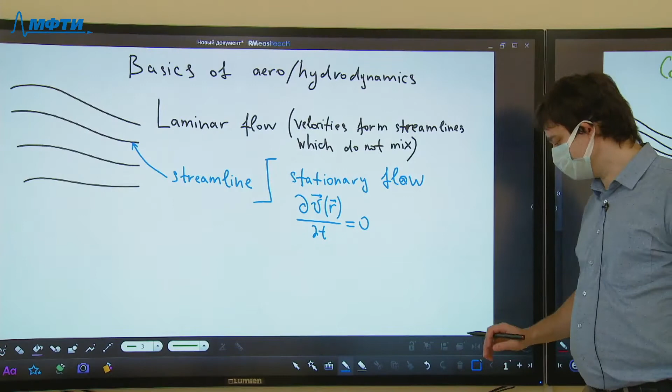Today the topic of the lecture would be basics of aero and hydrodynamics. So we are going to stop discussing gases and liquids which are held in place, which don't exhibit any kind of macroscopic movement, and we are going to delve into the subject of flows of liquids and gases. In addition to thermodynamic phenomena which happen due to microscopic motion of molecules, we would also discuss aspects which arise if there is also some macroscopic motion present in the system.

Given the appropriate conditions, like when the velocity of the liquid or gas is not too high, the liquid exhibits so-called laminar flow. Laminar flow means that you can separate all of the flowing portions of your fluid into so-called streamlines.

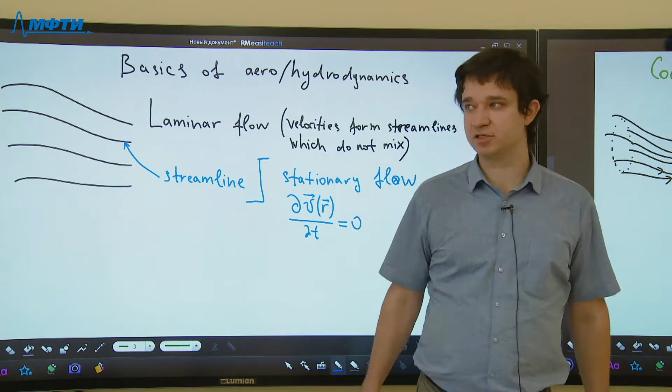Each streamline you can consider as a tube which consists of gas or liquid, and the different tubes do not mix. So indeed the motion of all of the particles seems as though they can be separated into many different threads which do not mix with each other.

Of course this is one of the simplest types of flow, and there is a counterexample. The flow can be pretty much different, and another type of flow is called turbulent flow, when you have a chaotic and complex movement of fluid in the liquid or in the gas.

This one is the most simple, and we are going to make it even more simple by assuming that the flow is stationary. Stationary in this context means that all of the velocities at any point of the fluid are functions constant in time, so as time goes on, nothing changes in the distribution of velocities. Here I have written this condition as the partial derivative of velocity over time being 0.

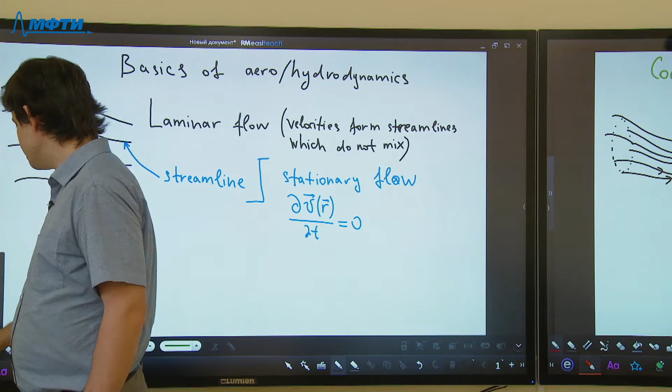Now we are going to establish some important laws which govern the flow of the fluid. One of the most obvious ones is the continuity equation.

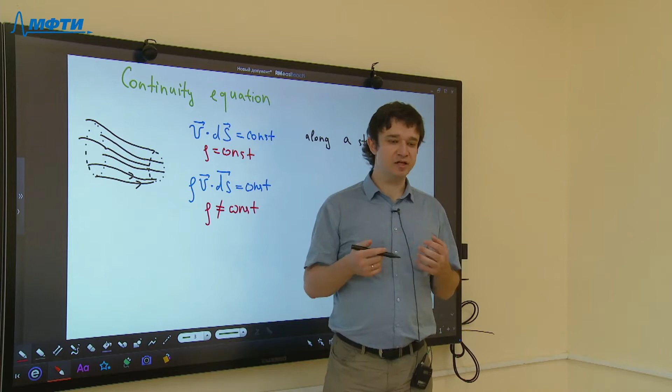If you don't have any kind of disruptions or cavitation, where there are some parts of volume not filled with the fluid, then you can assume that for any closed volume, the most basic condition is that the amount of fluid inside that closed volume remains constant, so it doesn't change with time. In terms of dynamics, that means the amount of liquid which flows into the closed volume should be exactly equal to the amount of fluid which outflows from that closed volume.

This condition can be written mathematically. If you consider, for example, a streamline, then you can associate a cross-sectional area of that streamline. That cross-sectional area is not a scalar but a vector value, because as discussed during your calculus course, if you have any kind of surface...

...then you can ascribe a vector which is perpendicular to the surface and whose absolute value is equal to the area of the surface. That would be a so-called element of the surface. The direction of that element of the surface depends on which side you consider to be the inner side and which side is considered to be the outer side.

For example, let's say something which is below this surface is considered to be the inner side over some side wall. Then here goes the outer side, something located outside of the closed volume, which is formed by the whole surface, not by an element, but the whole surface. So you take the direction of that vector to be directed to the outside of the surface.

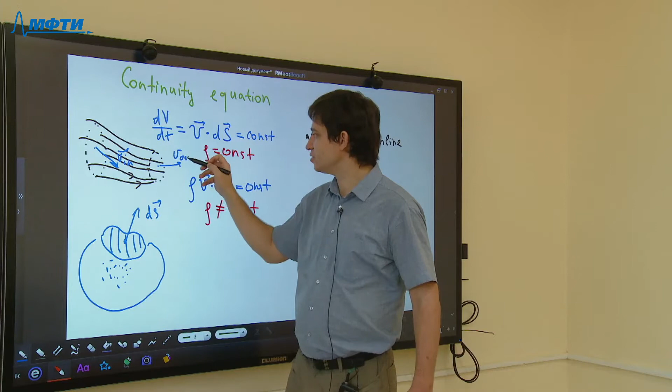And if the density of my fluid remains constant, which is approximately valid for any liquid, then I can assume that if I take the inflow equals to the outflow, so let's say this is V in and this is V out. So if I write that inflow equals to the outflow, and since I consider the closed volume whose side walls are going along the streamlines, that means there is no flow of liquid through the side walls of my closed surface. So that means that all in all, I need to write that the product of V times ds should remain constant along the streamline.

And that's assuming the density is constant. But if I consider gas, and for example, if I assume that the temperature of the gas is different at different parts of my flow, and also the pressure of the gas may change at different parts of my flow, then I need to slightly modify this condition. I need to also add density of my fluid into this equation. So in this way, this expression would give me mass per unit of time which flows through the surface. So no longer can I say that the volume coming in should be equal to the volume coming out. To demand that the amount of fluid remains constant, I need to demand that the mass of the fluid which goes into the closed volume should be equal to the mass of the fluid which goes out of the closed volume. So that is for when the density is not constant.

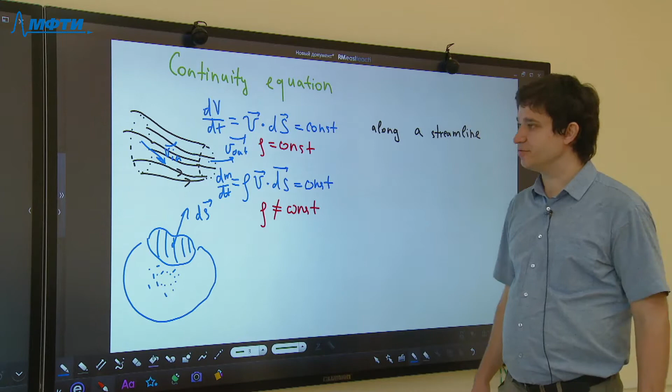Okay, so that is for the continuity equation, but we should also have another kind of equation. That equation should represent, for example, energy conservation law. And in the case of hydro and aerodynamics, it's typically assumed that the so-called Bernoulli equation does the job. So Bernoulli equation represents the energy conservation law in my fluid. Well, I have seen some statements that this is not exactly true. So actually, Bernoulli equation describes something more complicated than just energy conservation. But for the simple case I'm going to discuss now, these nuances would not be of any matter. So Bernoulli equation would indeed be the energy conservation law.

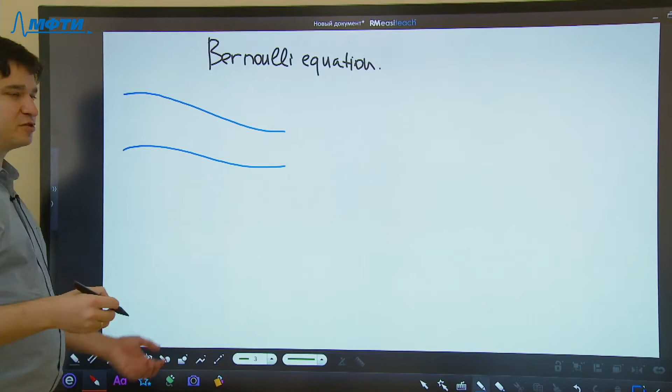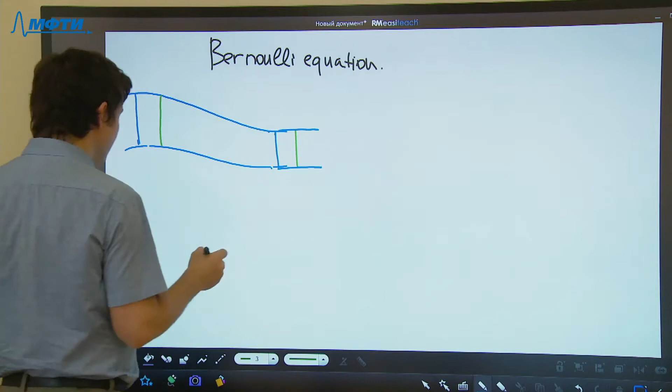So let's first derive, for simplicity, the Bernoulli equation for the liquid. So once again, we are going to consider some volume which is occupied by a number of streamlines. And so I'm going to consider a streamline here. So I'm going to consider a streamline, and since I'm considering a streamline, that means I consider a laminar flow of the liquid, but moreover, I also consider a stationary flow here. You will see how it really matters in case of the Bernoulli equation.

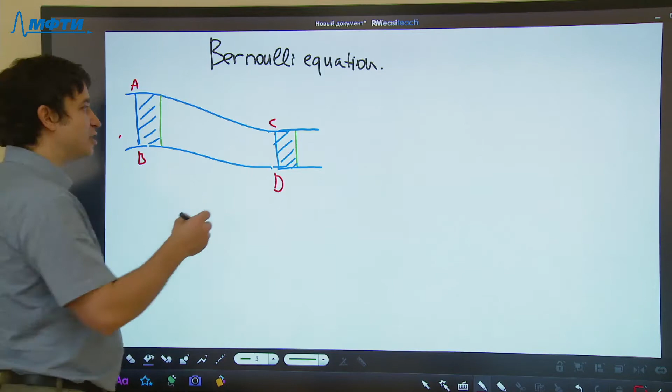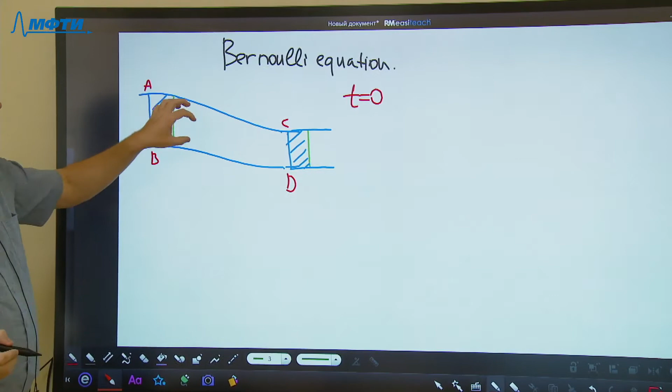So now I assume that I choose some surface, let me denote some points here. Let it be points A, B, C, and D. So that's a projection, but of course, when I say A, B, I don't mean the line, I mean the surface. So if I consider the surfaces, let's assume that first I look at my fluid at some moment of time t equals to 0. And I have surfaces AB and CD, and I consider the fluid which is located in between these two surfaces. So in between these two surfaces, I consider the volume ABCD.

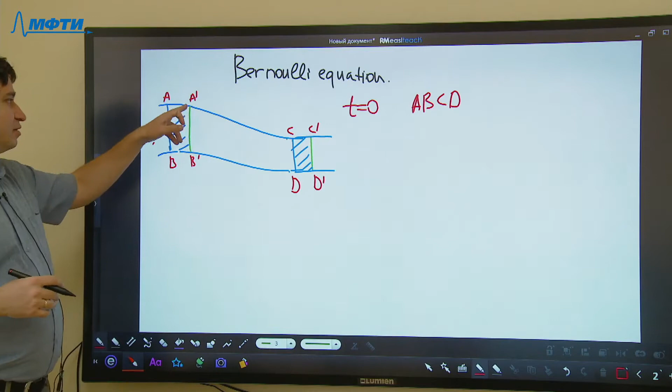And now what I'm going to look at is that with the passage of time, my liquid would shift from its initial position. So that means that after some time has passed, all of my fluid would be located in between, now again, in between the surfaces A prime, B prime, and C prime, D prime. So instead of the volume ABCD, all of my fluid shifts to the volume A prime, B prime, C prime, D prime. So I focus on the same molecules of fluid. So they initially have been here, but due to the motion in the flow, they have been shifted.

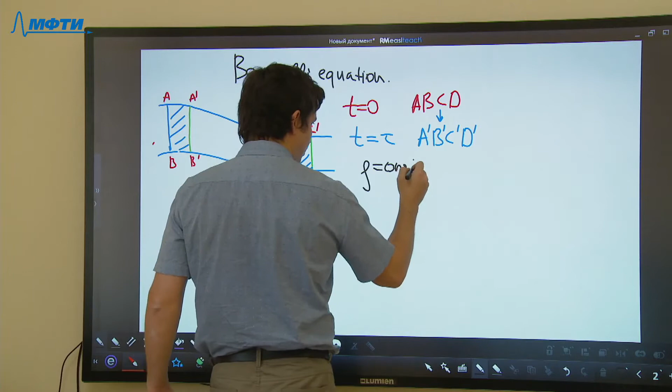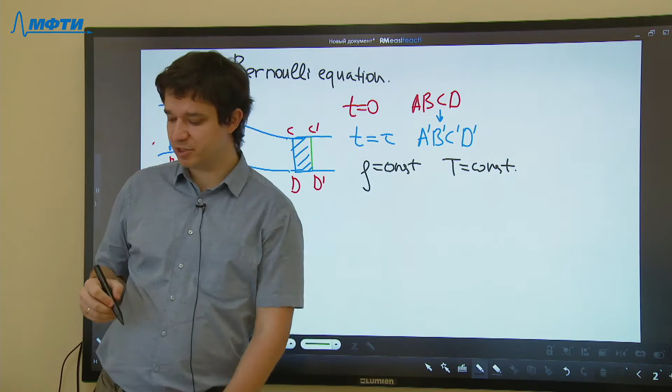So now let's write the energy conservation law for all of that. And for now, let's assume that the density of this fluid remains constant. So let's assume that we are dealing with a liquid, so that's a constant. And now also let's assume that temperature here is also constant. So let's give some more approximations, let's consider the most simple case. And also we need to assume that there is no friction in the system. So in this case, in textbooks, it is said that we deal with the so-called ideal liquid.

Ideal liquid, in which, for example, viscosity is zero. So there is no friction in between this streamline and other streamlines which are located close by. There is no energy loss in my system.

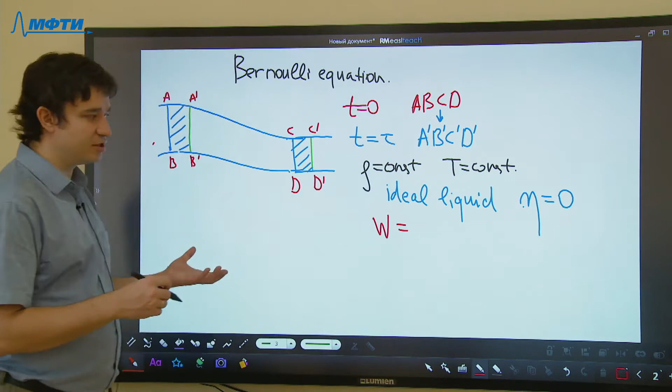So then I can write the following equation. The equation for conservation of energy is as follows: the work done on my liquid in this process from t equal to 0 to t equal to tau should be equal to the change in the energy of my liquid, and the change in energy includes both the change of kinetic energy, delta K, plus a change in the potential energy.

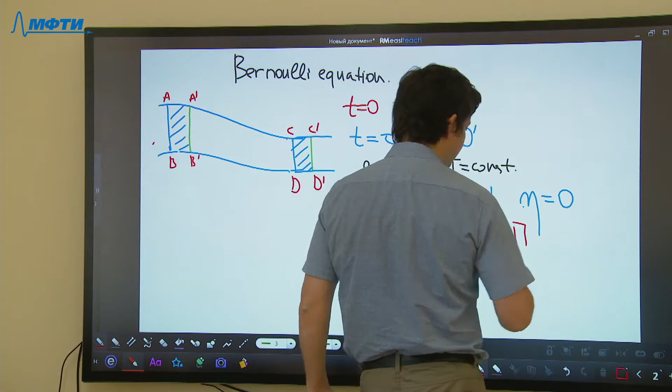So let's say, for example, we also have gravity in our problem. So then there would be potential energy too.

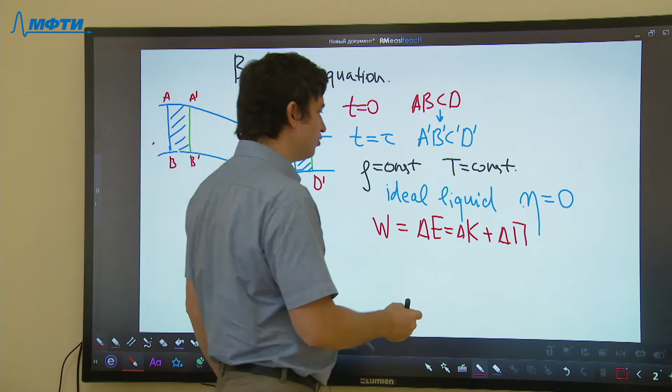Now let's calculate both sides of this equation. For this, we need some additional assumptions. We need to assume that the streamline we consider is so small that the pressure everywhere here is constant, and the pressure everywhere on this surface also remains constant.

Moreover, I assume that not only the pressure along the surface AB, but also the pressure at the surface A prime, B prime are also constant. That pressure I would call P1. And also I assume that the pressure on surface CD and on surface C prime, D prime is P2.

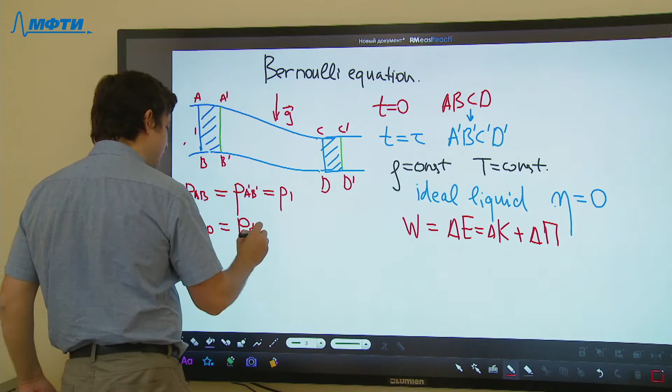These assumptions are not unrealistic, they're actually quite realistic, but it requires you to consider a very small streamline and a very small displacement. That means that the amount of time tau which has passed from the initial moment is very small, so the shift of the fluid is very small, and the pressure hasn't been able to change during the shift. That allows me to calculate the work done on my fluid quite simply.

I just need to, let's say, consider pressure acting from here, P1, and pressure acting from here, P2. That would be external pressure. As I consider the portion of fluid in between these two surfaces, external pressure pushes from the outside to the inside.

So I write, for the work done, P1 times delta V1 minus P2 delta V2, where delta V1 is the volume change here, and delta V2 is the volume change here, and actually these two volumes are equal. So I can replace them by some delta V, but let's write first delta V1, delta V2. I think that will be dealt with afterwards.

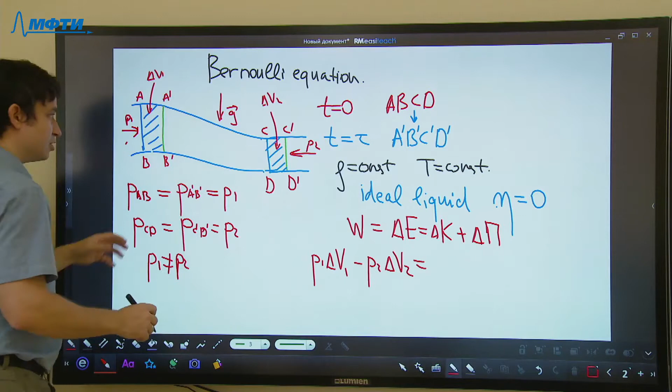So I assume that these two parts of the fluid are spatially separated. While there is almost no separation in space—this portion is located in a very small amount of space, and this one too—the separation in between these two portions of fluid can be large. That means that the pressure can change from one value to a different value, and the change can be quite significant, so it can be large.

With these assumptions, I am able to calculate work quite easily. It is done in the same manner as I have done the work done by the gas. So I calculate the pressure times the change in volume, and again here, pressure times change in volume. But here, negative work, because my surface goes counter to the pressure, and here, the surface goes along the external pressure. That's why here the work is positive, but here it's negative.

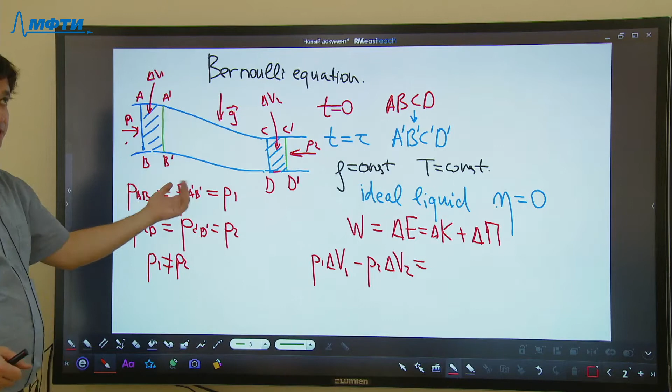So, all in all, that gives me this. And to calculate the change in the kinetic energy, if I want to calculate the change, then first of all I need to calculate the kinetic energy in the volume A, B, C, D, the initial volume occupied by the liquid.

It would be minus initial kinetic energy plus final kinetic energy. So to calculate the increment, I need to subtract the initial value from the final value. The final value would be kinetic energy in the volume A prime, B prime, C prime, D prime.

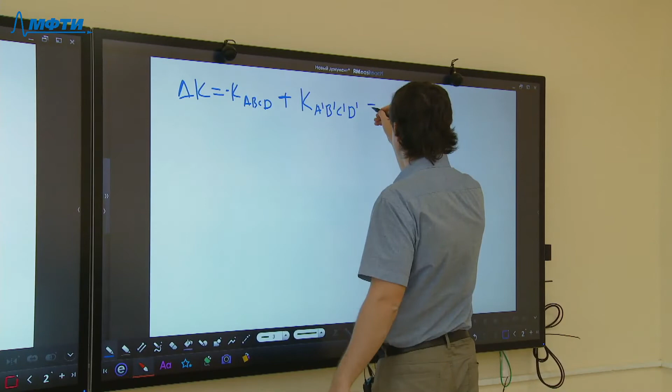But that means I need to know the kinetic energy in the whole of this volume, which is quite difficult because I also have this large volume here, and I might not even know the distribution of velocities inside it. So it looks quite difficult to calculate.

But it turns out that the kinetic energy inside the volume A, B, C, D can be presented as the sum of the kinetic energy in the small volume A, B, B prime, A prime - that's delta V1 - plus the kinetic energy in the very large volume A prime, B prime, C, D.

And I can do a similar procedure for the kinetic energy between A prime, B prime, and C prime, D prime, which gives me the kinetic energy in A prime, B prime, C, D, plus the kinetic energy in the very small volume C, D, D prime, C prime.

What remains is the kinetic energy in volume delta V2 minus the kinetic energy in volume delta V1. Since both volumes are very small, I can write this as density times V2 squared over 2 times delta V2 - since density times volume gives mass, and mass times velocity squared over 2 gives kinetic energy - minus the same expression for the first volume, minus rho V1 squared over 2 times delta V1.

The same can be written about the potential energy. I'm not going to reproduce this argument again, I'll just write the result: the potential energy in volume delta V2 minus potential energy in volume delta V1, which gives rho G H2 times delta V2 minus rho G H1 times delta V1.

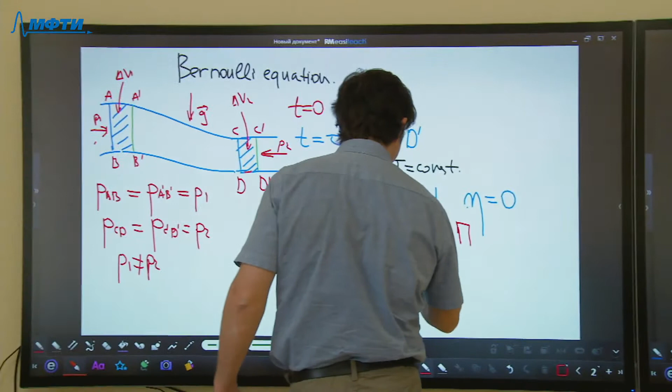I also take into account that delta V2 equals delta V1, which follows from the continuity equation, and that the density is the same. So altogether, after plugging in, I can write this as rho V2 squared over 2 plus rho G H2, minus rho V1 squared over 2 plus rho G H1, all multiplied by delta V.

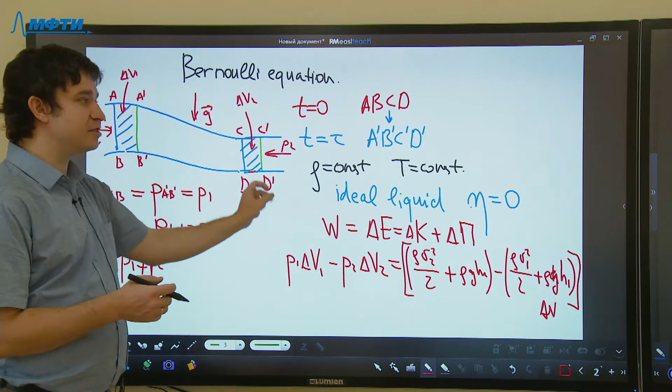So now you see where it follows - I can combine quantities related to the first portion of volume and the second portion of volume. After combining them all together, I get the equality: P1 plus rho V1 squared over 2 plus rho G H1 equals P2 plus rho V2 squared over 2 plus rho G H2.

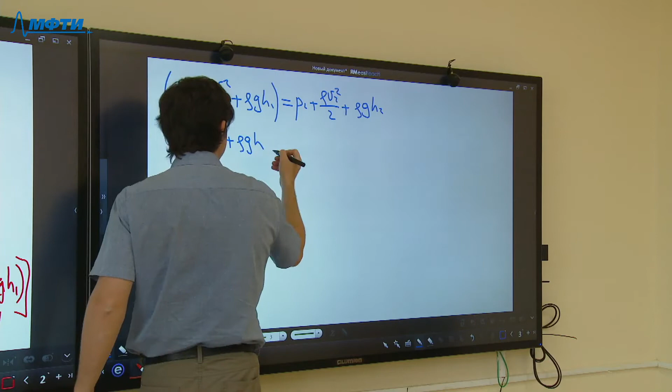So if I go along the streamline, even far apart from the initial point, this quantity remains constant. This is how Bernoulli's equation is sometimes written: P plus rho V squared over 2 plus rho G H is constant. Okay, let's now have a 3-minute break.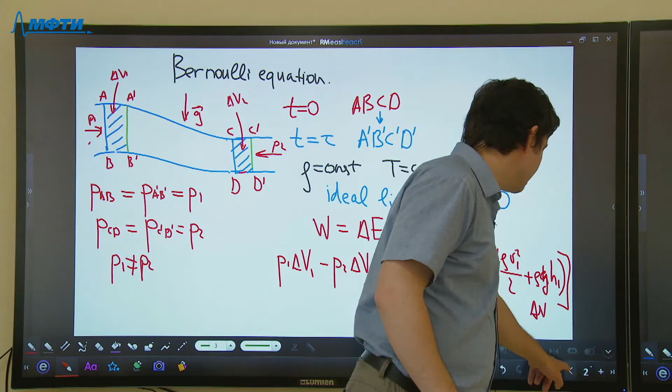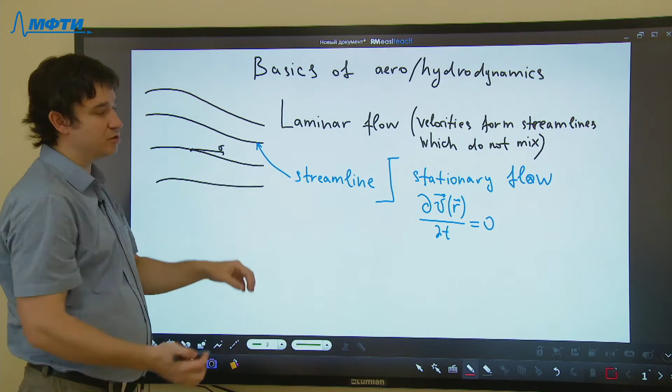In the very first slide, I introduced the concept of laminar flow, in which velocities are distributed so they form streamlines that do not mix. Then I introduced the concept of stationary flow, which I extensively used in deriving Bernoulli's equation. Bernoulli's equation is valid only for stationary flow, because it heavily relies on the argument that the energy in that very large part between the two points I considered remains constant.

After that, I have discussed the continuity equation.

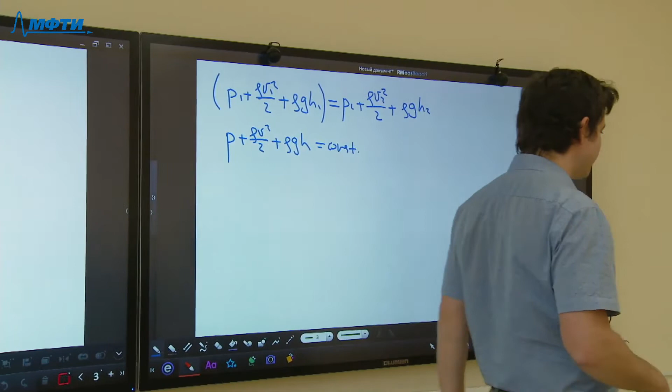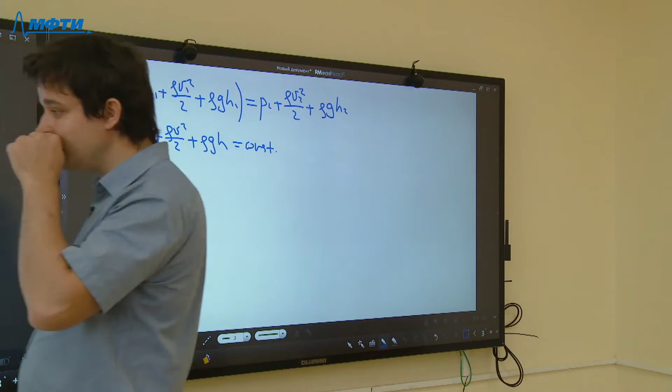In the following part of the lecture, we are going to rederive Bernoulli's equation in a more complicated case. We are going to include the possibility of temperature changes and changes in density, since we aim for a new equation to describe not only the flow of liquid, but also the flow of gas. The other assumptions remain the same: I'm again going to assume that my flow is stationary and laminar.

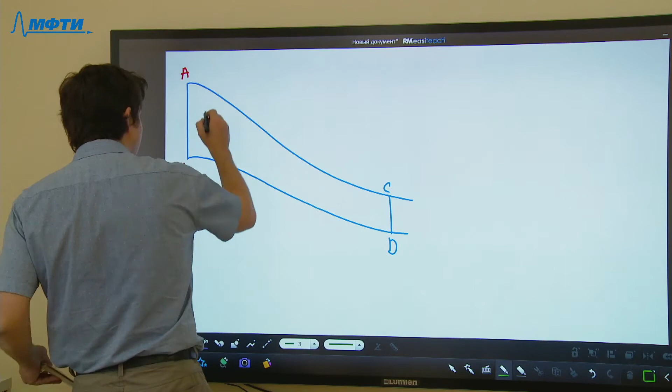Let me start again from the very same picture as before. Let's assume we have some sort of flow, and we look at the amount of liquid between these two surfaces, A, B, and C, D. Wait for a small moment of time to pass, and see that these surfaces have been shifted by the motion of the gas.

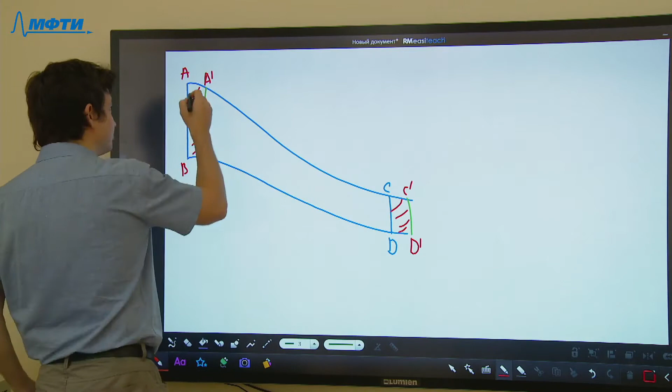Now once again, I have two portions here. One portion is being subtracted and its volume is delta V1. And one portion is being added here, which is delta V2.

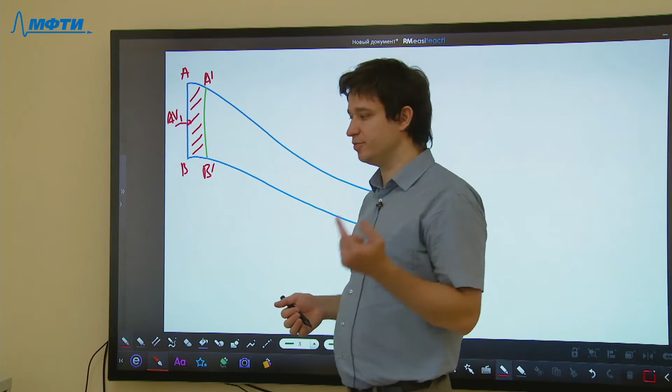So now I'm going to do the same stuff again, but previously when I wrote the energy conservation law, it was the energy conservation law for mechanical energy, so in my formulation I had kinetic and potential energy. But here, I should instead write the thermodynamic energy conservation law, that is, the first law of thermodynamics.

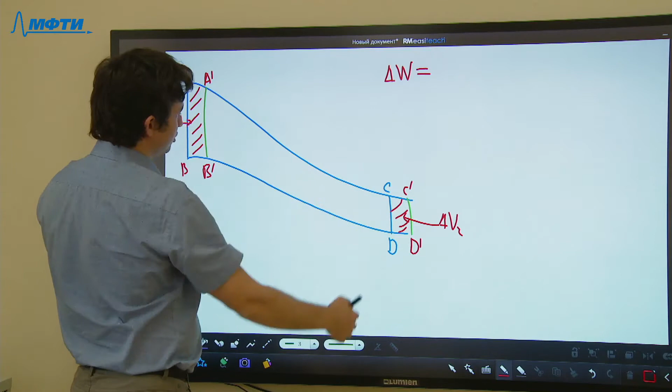So that would give me that the amount of work done on this portion of gas should be equal to the change in the internal energy of my gas, plus, once again, changes in kinetic and potential energy.

Okay, so now when I deal with gas, I can no longer take that delta V1 equals delta V2 — that's wrong, so I cannot use that anymore. What I can use is that the amount of gas in these volumes is equal: delta nu1 equals delta nu2.

So I will be aiming to express everything here in terms of the number of moles of gas in any kind of volume. Everything else remains the same.

For example, delta U is actually equal to the internal energy in the small volume delta V2 minus the internal energy in the small volume delta V1. And again, this is a consequence of the stationary flow.

So we have stationary flow, that's why the energy between these two surfaces doesn't change. All the changes happen only in these very small volumes, to the left and to the right of the large volume here.

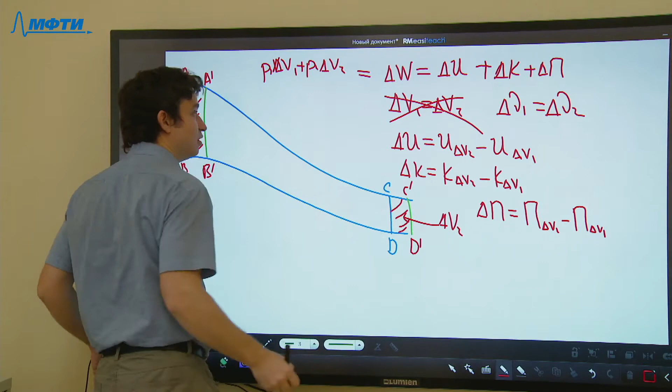Well actually, I can even omit the part which writes all of this in terms of speeds and so on. I can just write that this delta W is again equal to P1 delta V1 plus P2 delta V2.

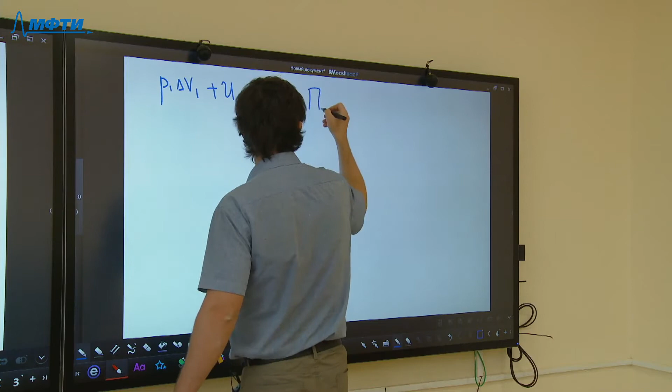Since I want to save some space on the blackboard for the derivation, I'm going to combine all of the terms related to each of the small volumes on each respective side of the equation. So I'll write that P1 delta V1 plus U delta V1 plus K delta V1 plus potential energy in delta V1 equals all of the same, but at point number 2.

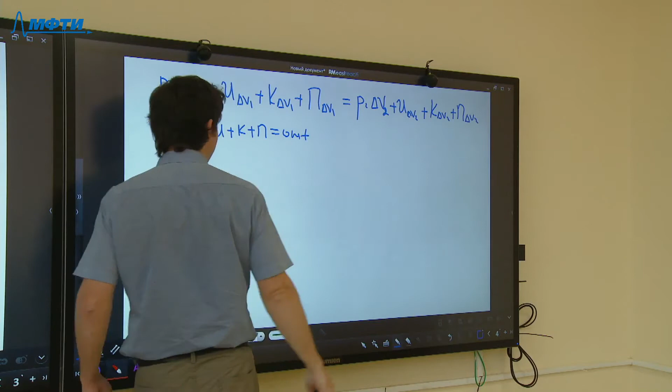So once again, I can write that P delta V plus U plus K plus (potential energy) is constant. So now I'm not going to carry all of the terms related to the second volume — I can say that in any small part of volume which has the same amount of gas in moles, everything written here will be the same.

Okay, now let's look at this part. The question to the audience: what is this? U plus P delta V.

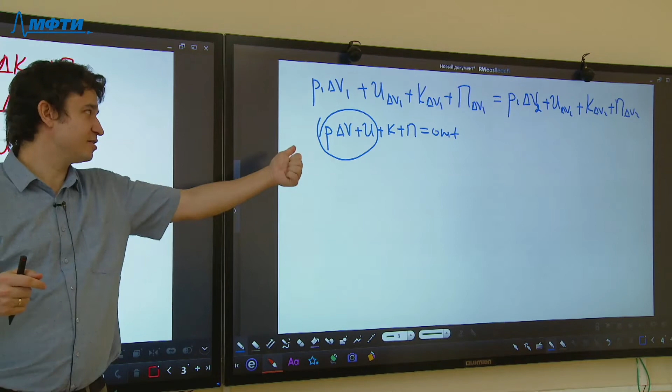The hint is that it is one of the 4 thermodynamic potentials. Remember one of them: internal energy, Gibbs energy, free energy, and enthalpy. And which one is this? This is enthalpy. Okay, so that's correct.

So I can write that H plus K plus Π is constant, for the same amount of gas. Since all of these quantities are additive, if I increase the amount of gas by a factor of 2, then all of them increase by a factor of 2.

I think we can write all of them with respect to 1 mole of the gas. So for example, enthalpy for 1 mole of the gas, kinetic energy for 1 mole of the gas, and so on and so forth. So enthalpy for 1 mole of the gas would be something like,

in case of real gas, it is some quantity H. I don't know which one, but there is some function. In case of kinetic energy, I can write that the mass of 1 mole of the gas is mu, so the speed is v, so mu v squared over 2. And potential energy for 1 mole of the gas is mu times g times h.

Oops, now I have trouble because h here is the elevation, so the elevation and also h here is enthalpy. So I can write as hm, molar enthalpy. Molar enthalpy plus molar kinetic energy plus molar potential energy is constant in the streamline.

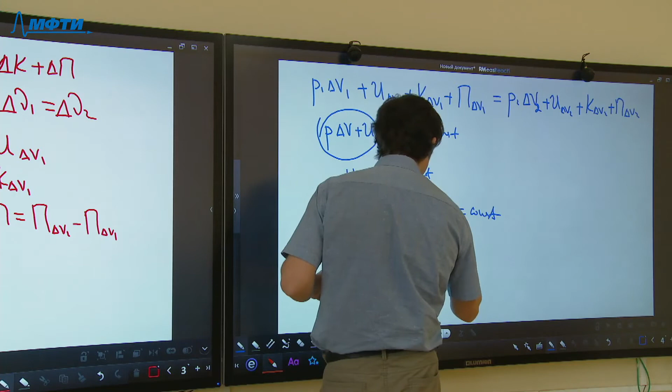Oops, and I have forgotten, oh yes, pressure is inside here. So instead of pressure, like what we had in the Bernoulli equation, we now have molar enthalpy.

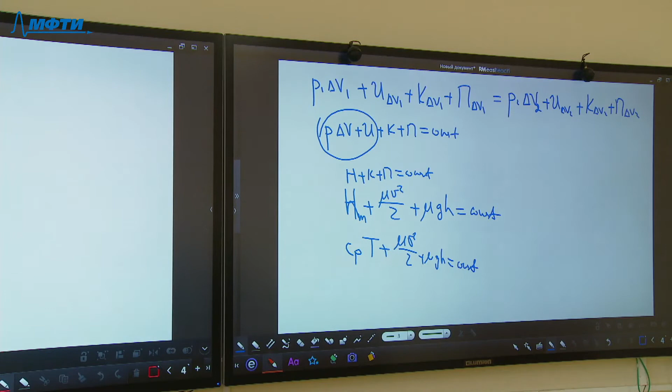And you know, we have previously discussed one of the processes which conserves enthalpy. Do you remember this process? It was discussed exactly during the previous lecture about real gases. I have said even that there is some sort of inversion temperature involved with this process, and also that this process is a core part of the industrial processes for liquefaction or obtaining cryogenic gases.

Joule-Thomson process or gas throttling. So it obeys exactly the same laws. Joule-Thomson process or gas throttling.

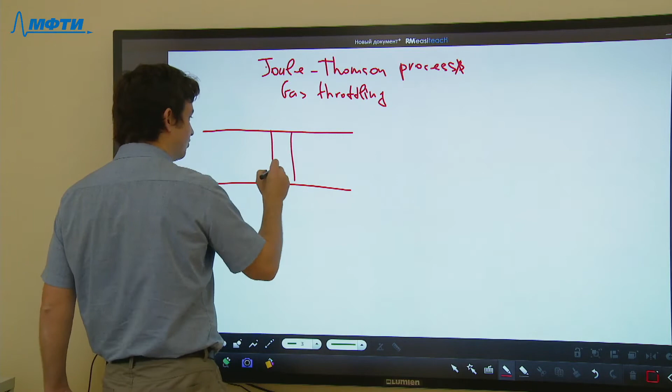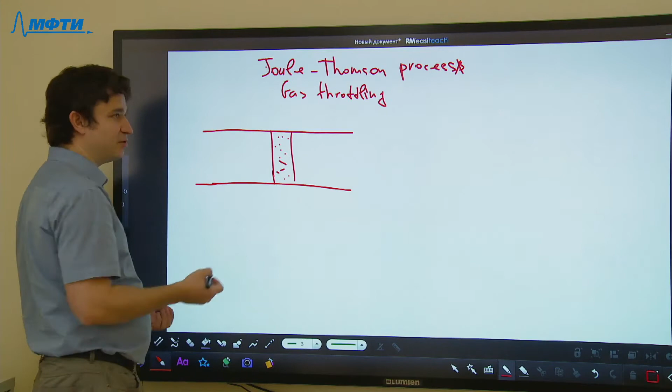So let's have a short reminder here. So in here I had some porous substance, but the flow of the gas to the left of that porous separator and to the right of the porous separator is laminar. So I can use the same law here, and everything is kept in stationary conditions. So that means that I can use the same laws for this exact process.

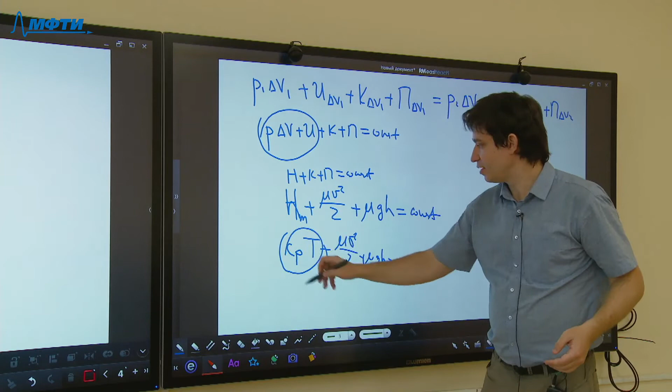But I neglect in my Joule-Thomson process the kinetic energy, because mostly this molar enthalpy in the Joule-Thomson process, molar enthalpy of the gas is Cp times T, but well, when I have the real gas, H molar is much larger than kinetic energies. Is much larger than kinetic energies.

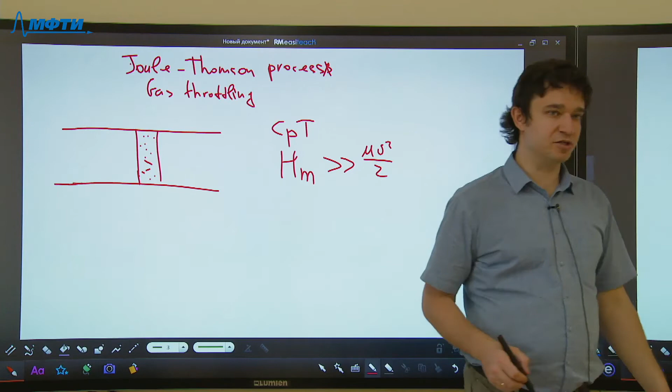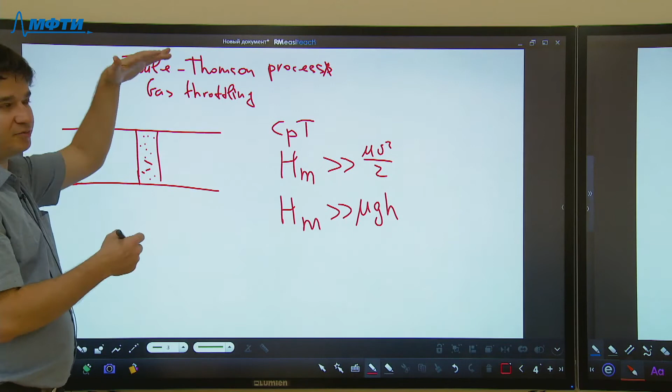So in this case, I can just write that I can discard the second term, and also the change of the potential energy is also very small compared to the molar enthalpy. So in here, Hm is much larger also than mu gh, so some changes in the height and between different parts of my setup. And that means that in the Joule-Thomson process I can write that H1 equals to H2.

So this is the isoenthalpic process.

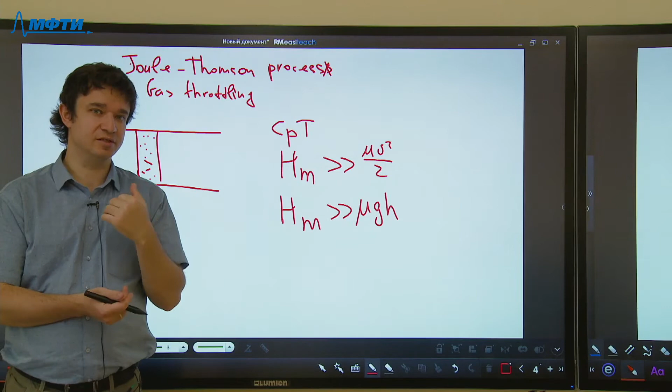Have you had the lab about the laboratory work about the Joule-Thomson process and properties of real gas? So I think you would have it, and if you look closely into the theoretical description, at first it contains all of these terms, but then some estimations are made which show that these properties are actually valid, so I can discard them.

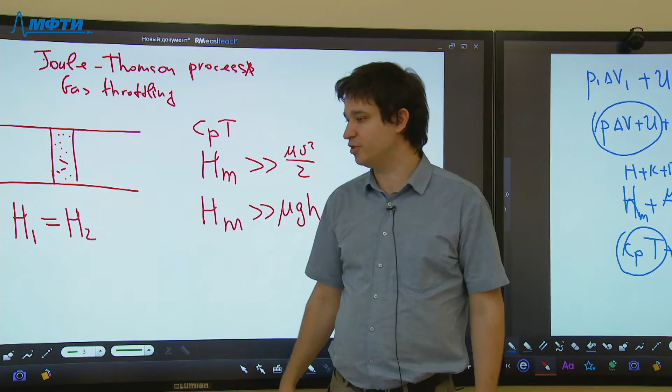So during the previous lecture, I haven't delved too much into the subject of the Joule-Thomson process. I have simply derived the equality of enthalpy. But actually, since the velocity of the gas may change to the left and to the right, and probably the velocity to the right is larger than to the left, there is actually some slight decrease in the enthalpy, but it is so small that it cannot be seen in any kind of characteristic.

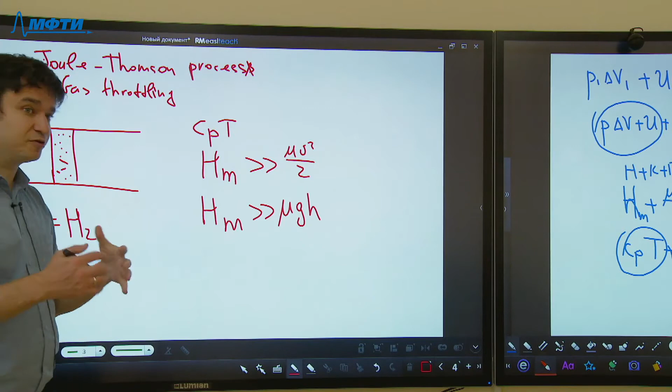Good. And once again, let's establish some sort of connection with the previous lecture. I have said that the Joule-Thomson process is irreversible. So that means that if I consider, for example, the entropy in this process, then I might discover that entropy actually increases. So let's check whether it's correct or not.

So in here, let's write, so we can write that the change in the enthalpy is 0. Yes, dH equals to 0. And now let's remember the differential for the enthalpy.

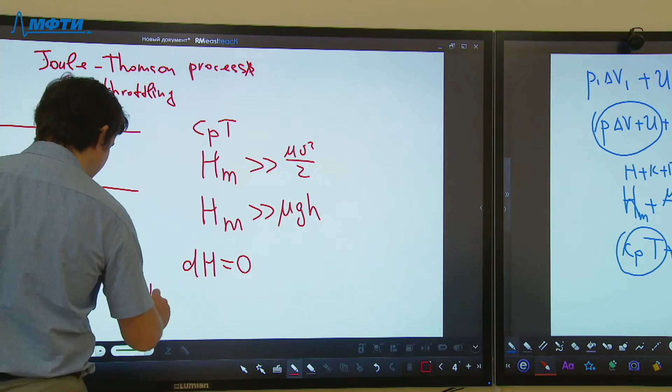Anyone want to volunteer to give me the differential for the enthalpy?

I use this differential so much that it's a hint you should remember them, along with the thermodynamic potentials. There's also some stuff to remember separately for those who major in biotechnology, which I'll cover during the next lecture, and some stuff for aerospace engineering. The biotechnology material was so important that your dean proposed a 2-semester thermodynamics course for the general physics department to cover it in further detail.

Okay, so dH. There are different approaches to finding the differential. One is that you have some paper where it's written and you can look it up. But say you're in an exam and have forgotten the paper, and I forbid you from asking relatives, friends, or other students of MIPT for the answer—then you can derive it yourself. At least you need to remember that enthalpy is internal energy plus PV.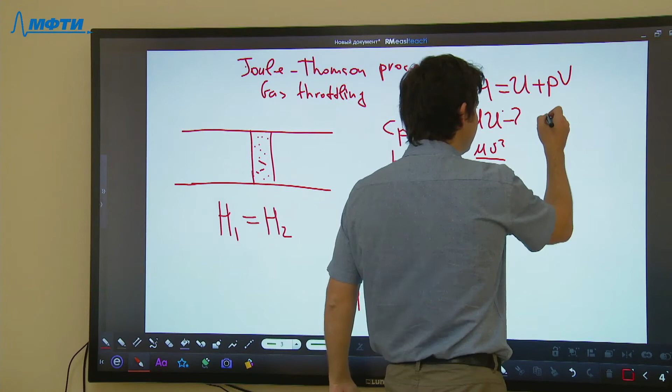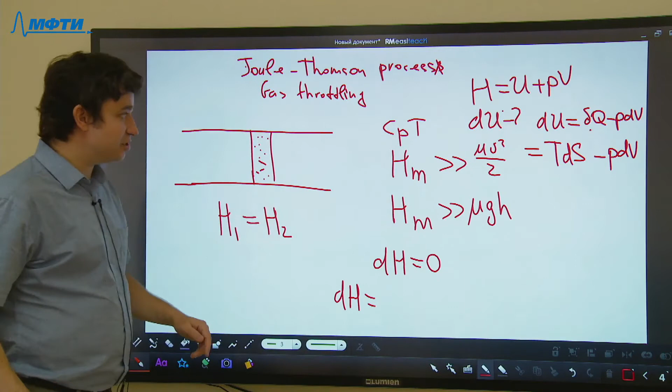You can write that dU equals delta Q minus P dV, where P dV is the work done and delta Q is the amount of heat supplied to the gas. Now, delta Q can be related to entropy according to the second law of thermodynamics, which gives T dS minus P dV. So now I'm going to plug this into the equation.

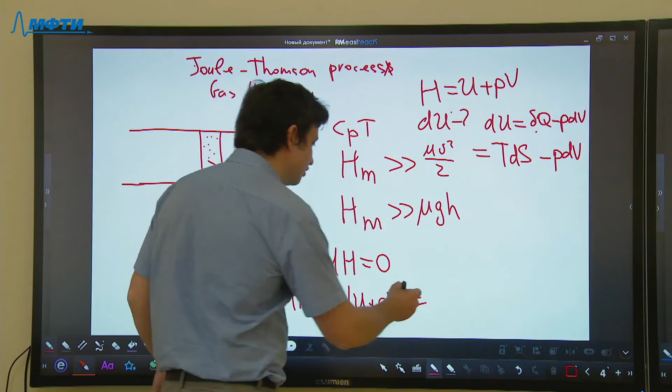If H equals U plus PV, I can write this as d of U plus PV. Now I'm having a fun calculus exercise with differentials. The rules for working with differentials are pretty much the same as for derivatives—the differential of the sum of two terms equals the sum of the differentials of the terms.

Now I have something new: the differential of a product, d(PV). I'll use the multiplication rule for derivatives to calculate this. First I replace dU with the expression we derived, then apply the multiplication rule to the differential. The rule says that to calculate the derivative of a product, you calculate the derivative of the first factor and the derivative of the second factor, combining them so that (uv)' equals u'v plus uv'.

For differentials it's the same: to calculate the differential of uv, you calculate the differential of u multiplied by v, plus u multiplied by the differential of v. So all the rules you know for derivatives apply without any changes to differentials.

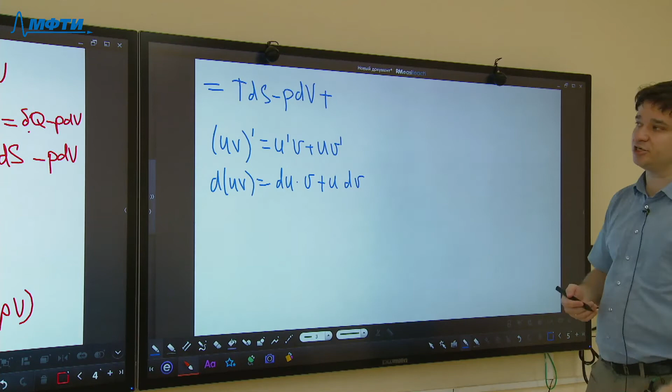So here I have d(PV), which gives P dV plus V dP. The P dV terms cancel out, so I can write that this is T dS plus V dP. In my isenthalpic process, dH equals 0, so T dS plus V dP equals 0.

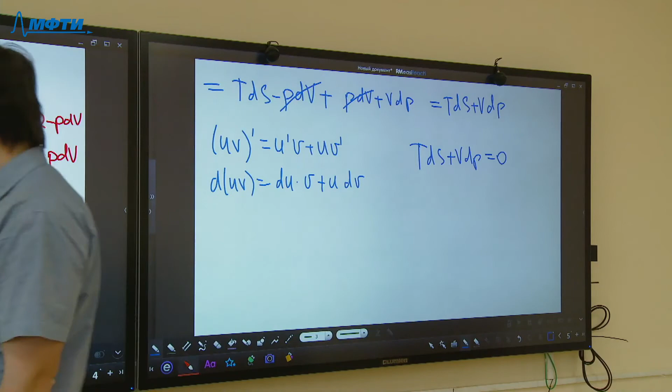But I've said that the Joule-Thomson process is irreversible, meaning I can push my gas when pressure P1 is larger than P2, but not the other way around. If I had a movie showing the Joule-Thomson process and reversed it, it would look as if small pressure were applied from one side and large pressure from the other, but gas flows the wrong way—this is impossible. So in my Joule-Thomson process, dP is less than 0.

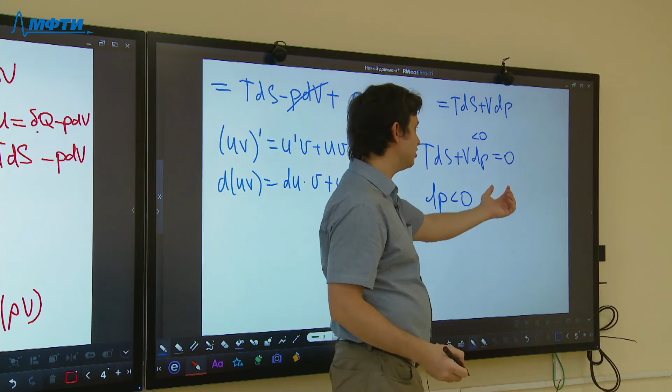That means V dP is also less than 0, but the whole sum is 0. So the T dS term must be positive to compensate for the negative second term. So in the Joule-Thomson process, dS is greater than 0, as should be expected from any irreversible process.

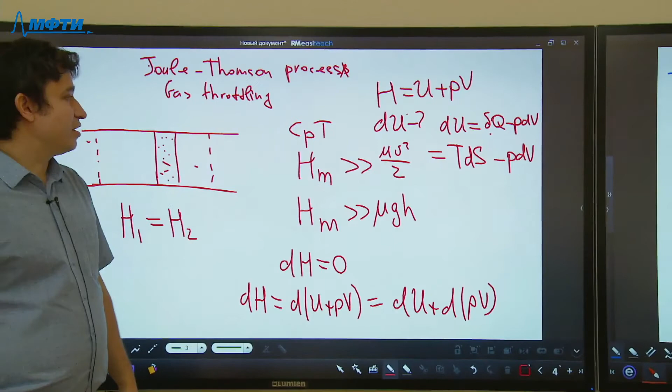Okay, let me see how much time of the lecture I have. Well, I have quite a lot actually, so I can discuss this stuff a bit more for you.

Biotechnologists and biochemists, in the lectures related to phase transitions, I derived the following important rule for equilibrium between different phases: the chemical potential of phase 1 is equal to the chemical potential of phase 2.

I haven't given you any explanation about why this quantity mu is called chemical potential. Have you wondered why this is called chemical potential while I apply it only to phase transitions? There is nothing chemical in phase transitions. But there are some properties of phase transitions that make them similar to chemical reactions.

First of all, it's a dynamic equilibrium. So in my case, when I have two different phases which are in equilibrium with each other, that doesn't mean I have a fixed amount of matter in each phase, because these two phases microscopically exchange molecules. Molecules from the gas phase come into the liquid phase and vice versa.

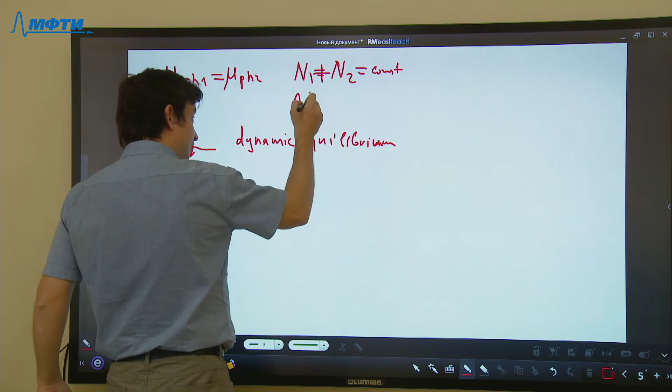During the derivation of this law, I assumed that the number of molecules in the first phase plus the number of molecules in the second phase is constant. So I can write delta N1 equals minus delta N2. For this reason I was able to obtain this condition.

In the case of a chemical reaction, if I have a reversible chemical reaction - not one where some gas emerges and flows away, but a reaction in liquid which can go both ways - I can write something like 2A plus 3B equals 2C.

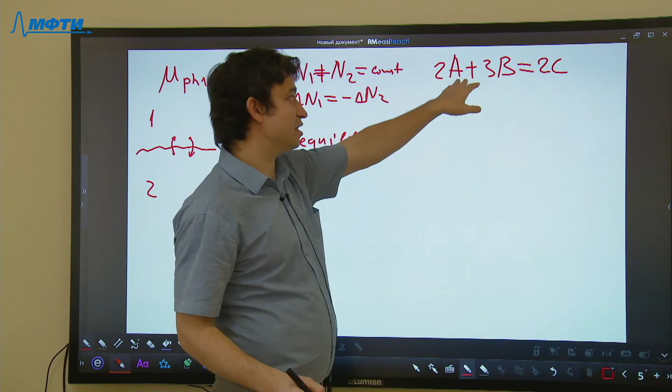These are chemical formulas. A, B, and C are molecules which interact with each other, and this reaction can go both ways, so here too there can be a dynamic equilibrium established between these two sides.

But in this case, instead of the simple condition for the number of molecules, I need a more complicated condition: 2NA plus 3NB plus 2NC should be constant. This condition is much more complicated than before. So I can get 2 delta NA plus 3 delta NB plus 2 delta NC equals 0.

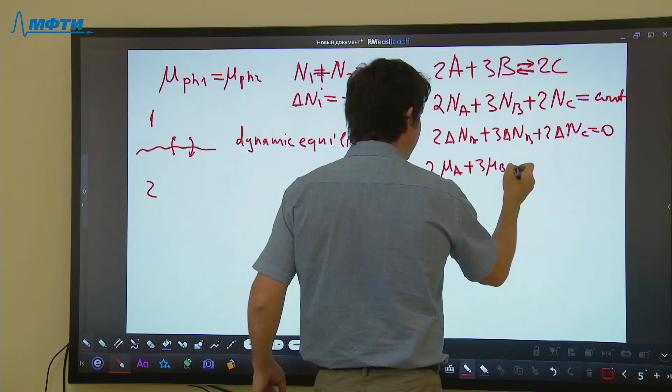Using the very same method of maximizing entropy in a closed environment, from this I can get the following equilibrium condition: 2 mu A plus 3 mu B should equal 2 mu C. Otherwise it wouldn't work. So in this case I would be able to get the equilibrium.

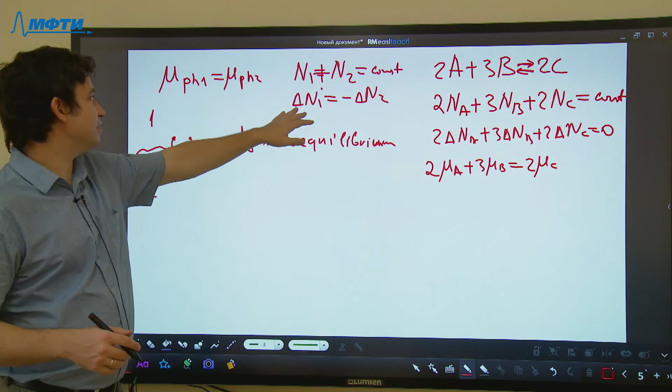Earlier I had delta N1 equals minus delta N2, and from that I got the simple equality condition. But here I have a more complicated condition for equilibrium. As you see, it's no longer the equality of chemical potential throughout everywhere in my phase. When chemical reactions are involved, this condition changes and looks slightly more complicated.

Now let's consider another case which has no relationship to chemistry at all: photonic gas. It's a very interesting kind of ideal gas, composed of photons, particles which move at the speed of light.

The problem with the photonic gas is that you cannot control the number of particles. Even if you have a closed volume, the photonic gas interacts with side walls, and photons can be absorbed and emitted by the side walls.

That's the problem, because, for example, the surface of a door is not a transparent object. So if a photon falls onto the surface of the door, it doesn't penetrate further. It is either reflected back into the room or absorbed by the door.

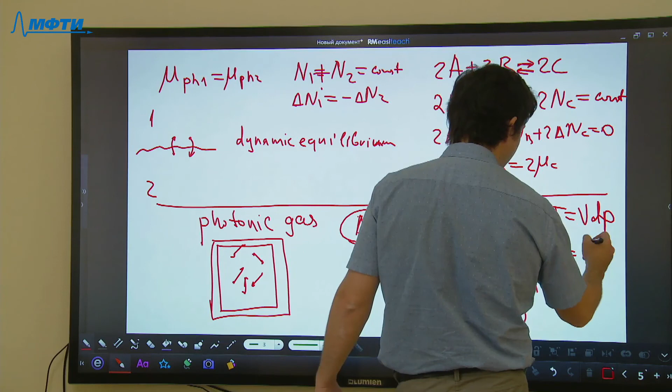Also, here I treated temperature and pressure as unrelated. Actually, these two quantities for the photonic gas are related, so you cannot consider them as independent variables. So you can only write that S dT equals to V dP. That gives you, for example, the derivative of pressure over temperature - this should be equal to entropy over volume. That's the only equation I can obtain using this approach for the photonic gas.

To get something more, I need to consider the physics of photons. More about the physics of photons, I think I would send you as a handout on your email. I can go even further, but I need to introduce something more about the physics of photons.

But the most interesting part here is that the equilibrium condition is mu equals to 0. And this is also why this chemical potential is called the chemical potential, because it really applies to chemical reactions.